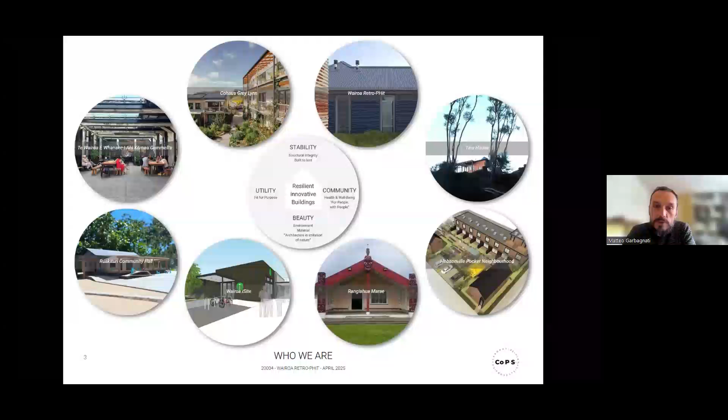Jessica introduced us, so that was already starting what I'm about to say. That's us, the two of us, Gabriele and me. We are based in Hawke's Bay at the moment. We started our journey in New Zealand in Auckland, then we moved here 5 or 6 years ago. So at the moment we are here in Wairoa, and there is a slide showing where we are. That's what we do. We have done a series of community projects, public spaces, private as well. Private projects, I mean residential, a bit of a range. We have done some work for the marae as well, mostly local, and some work also in Auckland.

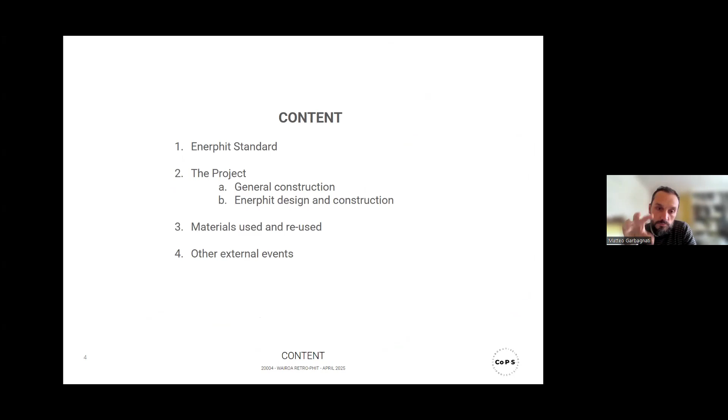About the presentation, what I would like to go through is first an introduction about the EnerPHit standard, then talking about the project, general construction stages, and then more details about the actual EnerPHit design and construction, and then briefly about materials used, reused, and whatever else we've done, and then touching on other external events at the very end.

And regarding the standard, some of you, I'm sure, are familiar already, but the certifications that the Passive House Institute created are three families. There is the actual Passive House, which is usually for new builds or retrofits. Then there is the EnerPHit, which is just for retrofits. And there are two methods for that. We'll touch on it as well.

One is the component method, and one is the energy demand method, which is very similar to the Passive House certification. And then there is the low energy building, where the requirements are a little bit lower, and that can be for buildings and retrofits. The EnerPHit component criteria, which is the one we followed, basically establishes minimum criteria for components, so the assemblies on the envelope, wall, roof, slabs or whatever else, and windows and doors, so exterior openings.

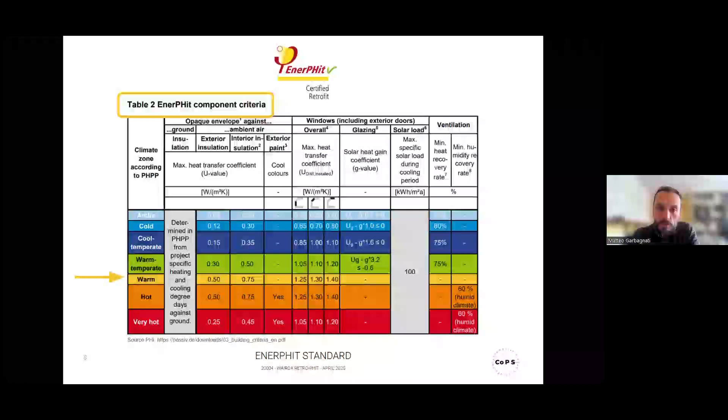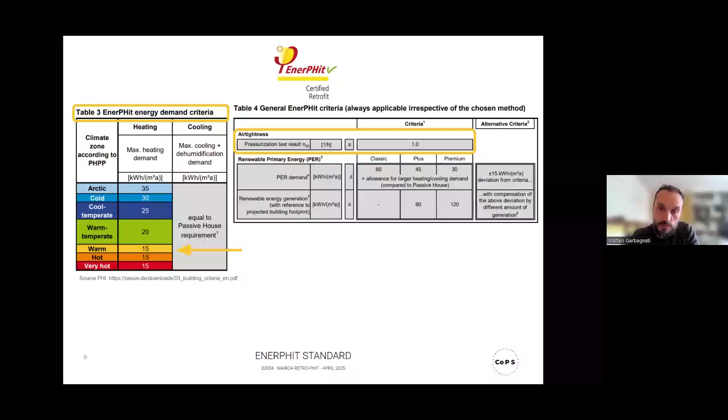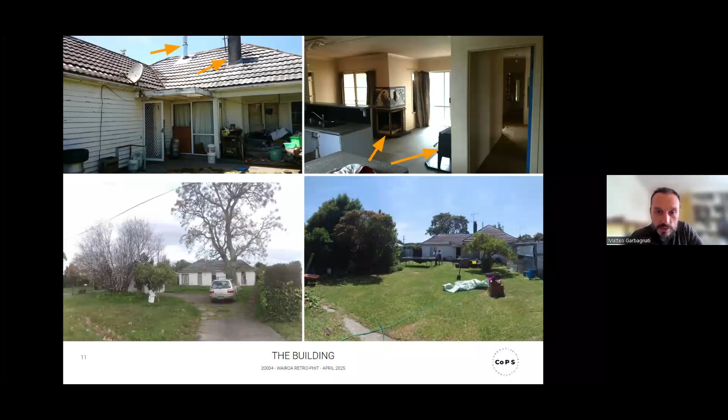So quite spacious. We liked the house because it has some interesting elements, in no specific order. There was all the volume in the roof, as you have seen from the other photos. The roof is quite pitched, about 35 degrees, and the ceiling height was 2.4 standard. So immediately we thought we could do something with that. And the other quite strong element was these floor-to-ceiling windows. It was a bit awkward that you could only open the top as a sort of awning, but that was quite striking, and that was along the whole north facade.

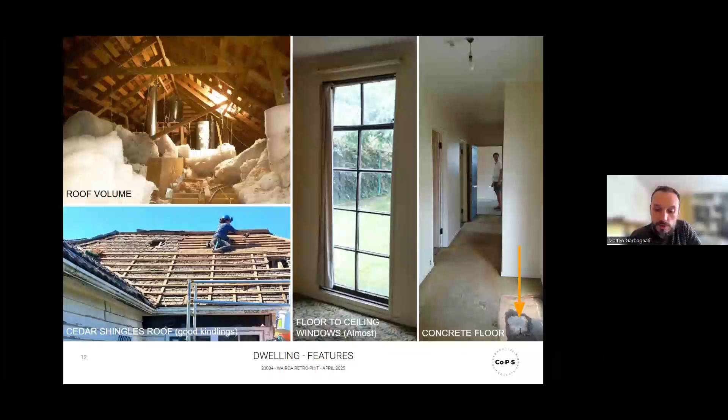And then there was the concrete floor, as you can see here, bottom right, through the worn-out carpet. And something we discovered later was that the old roof under the pressed metal tiles used to be cedar shingles. That was telling us that whoever built it cared about the way it looked, but obviously they were quite budget conscious as well. Then, of course, as you start the demolition, you discover all these nice surprises: wasps' nests in the wall cavities, asbestos ceiling, borer everywhere, a bit of rot here and there. But that's just part of the game.

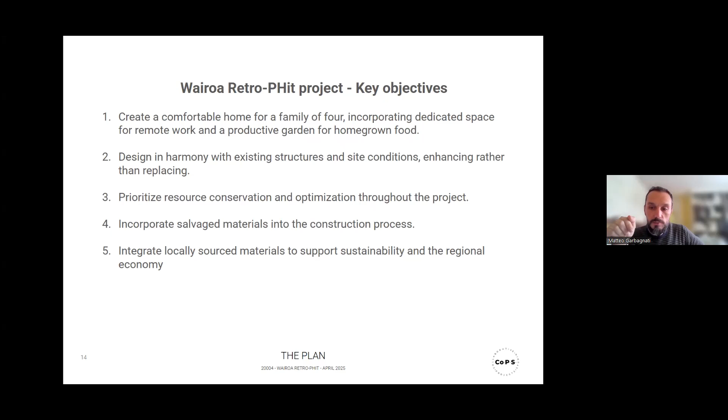And the key objectives for the project were to create a comfortable home for a family of, say, four, incorporating dedicated spaces for remote work, a productive garden for homegrown food, design in harmony with existing structures and site conditions, enhancing rather than replacing, prioritizing resource conservation and optimization through the project, incorporating salvaged materials into the construction process, and integrating locally sourced materials to support sustainability and the regional economy. And we managed to do a bit of that.

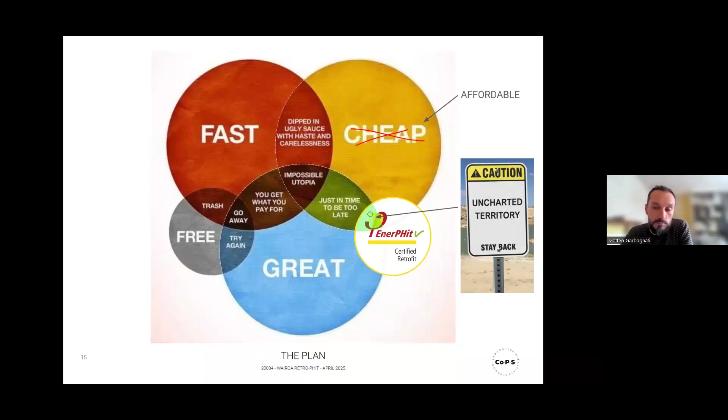You'll be familiar with the usual Venn diagram, where you can't actually have all of them: fast, cheap, and great, with some different variations of it. Obviously, we wanted this project to be good design, summarizing great. But we had and still have a very limited budget, so we are in the green overlapping zone. Plus, we also wanted to do a good quality, thermally efficient project. So that's why we chose the EnerPHit certification. It's a bit of uncharted territory, but we're getting there.

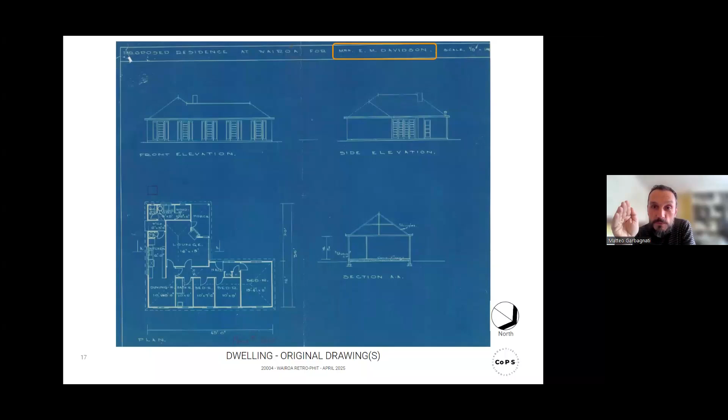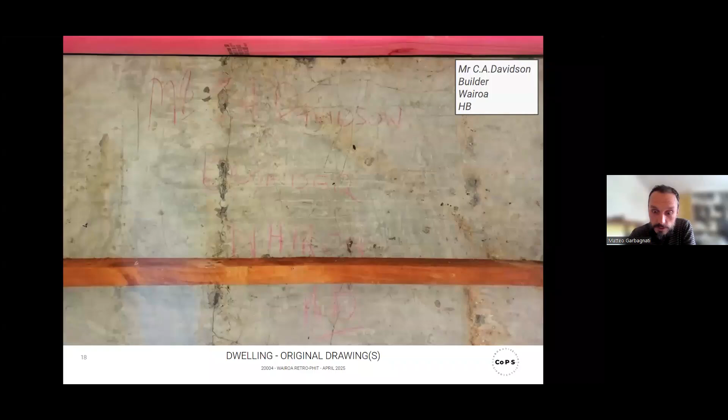Then we discovered, well, council had all documentation for this building, the historical documentation. This is the only drawing, so probably really that's all they had, and that's all it was actually produced. And this house was for Mrs. Davidson, and it was built by Mr. Davidson, so obviously it was the same family. And I found this signature inside one of the walls.

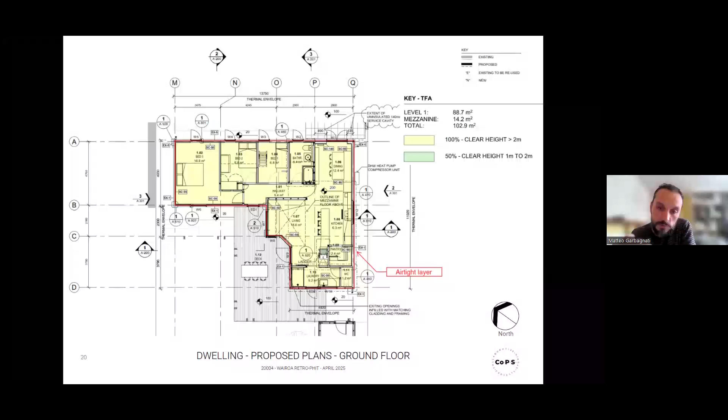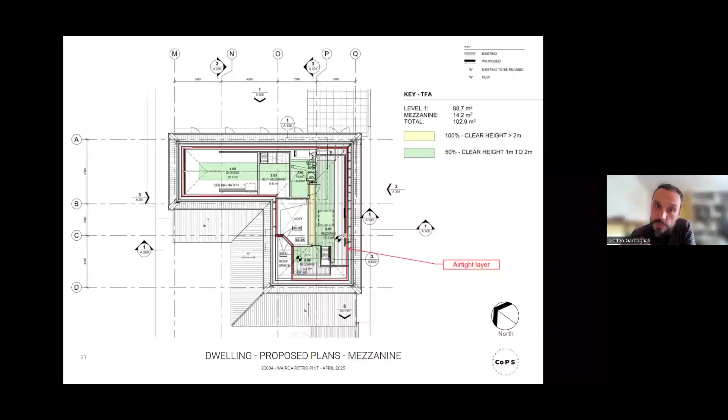Well, what's the new plan? 3-bedroom, 1 bathroom, nothing outstanding, and a laundry with a toilet and shower, and then kitchen, living, and dining all open. But because of all the roof volume, we reclaimed all the space in the roof, and we managed to create a mezzanine, which is open to the downstairs living area, a plant room, another little mezzanine for 1 bedroom, and then a bit of storage space.

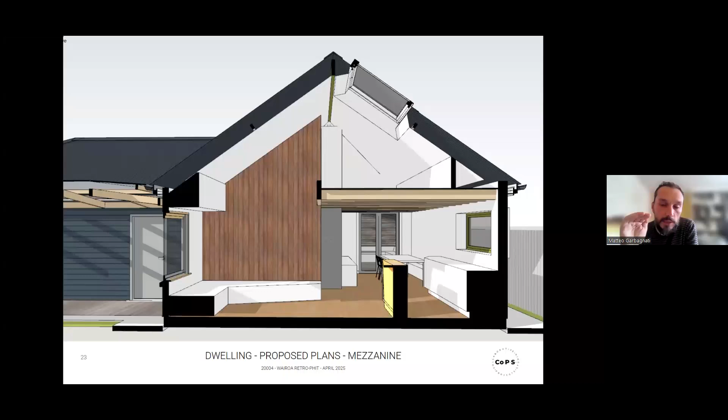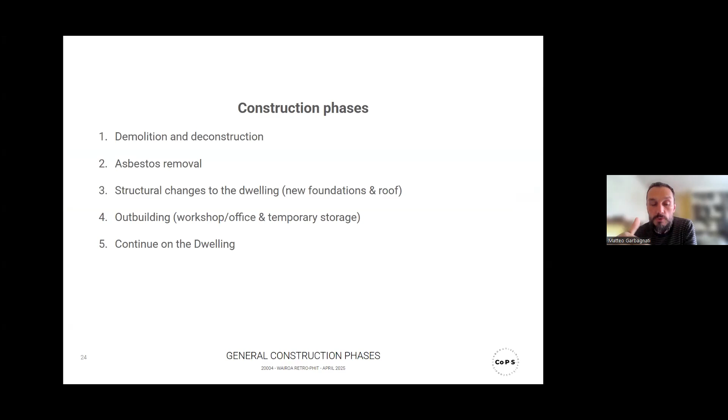Then construction phases broadly. So obviously demolition and deconstruction. Then we have done the asbestos removal. Then there were structural changes to the dwelling for opening up the roof and adding the mezzanine. And then there are a few photos about the outbuilding, which is not part of the certification, but it's important for what we're doing. And then the plan was to continue on the dwelling and finish it off. You can probably scroll through relatively quickly.

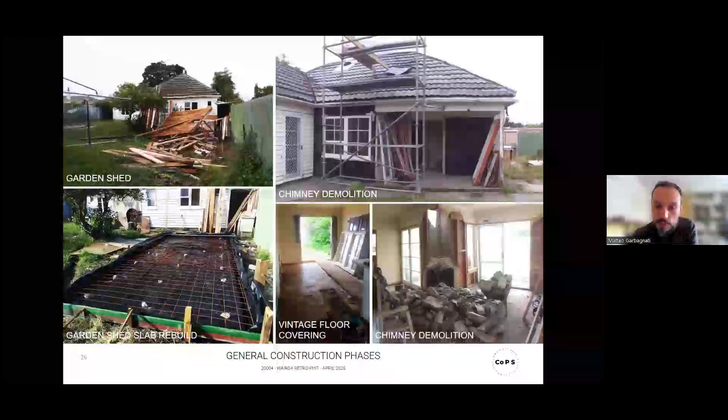Going from top left, there used to be a garden shed, which was nothing special, but I managed to reclaim some weatherboards. It was native timber, which I managed to then reuse in the house. That was great. Then the shed was kind of rebuilt, so a new slab built over. At the same time, we also started demolishing or deconstructing the house. We removed the chimney, we stripped off floors, we discovered several layers of vintage floor underneath.

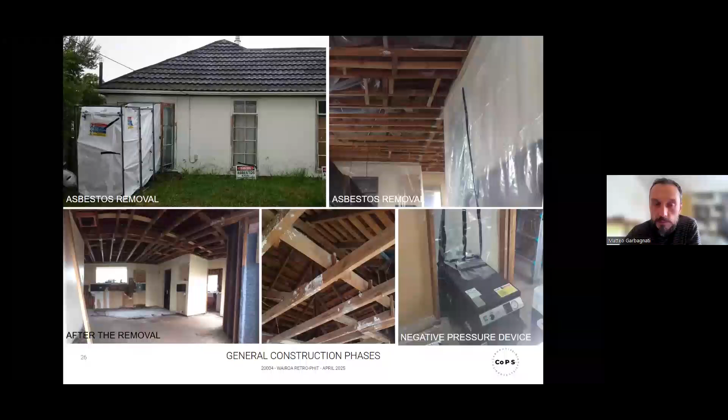Asbestos removal, we got it done by specialists, and that was great. Not too expensive either, I think it was around $5,000. That was probably one of the few things that we got done by someone else. Once they left, I removed all the ceiling joists here and moved them higher up so I could start with the mezzanine. Then there was the first time you could actually experience all this nice volume and space, and you can see the underside of the cedar shingles as well. It looked a bit more like a church rather than a house.

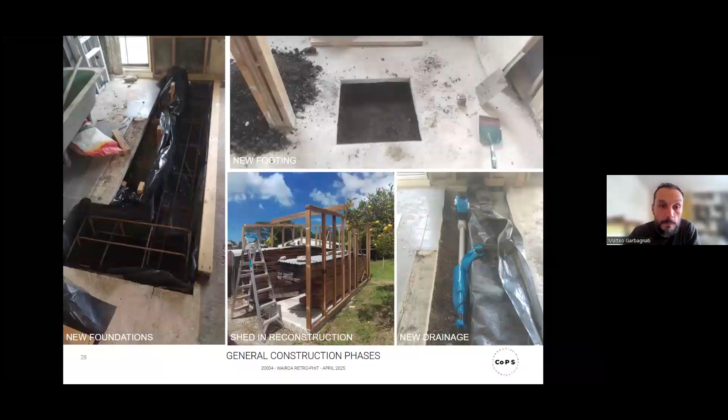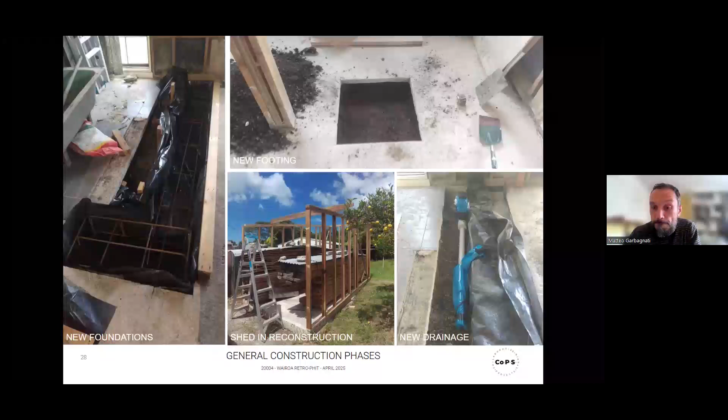Then we started with the proper structural strengthening, new foundations for the mezzanine, new roof structure. At the same time, we also rebuilt the shed, which was quite handy because we could dry the timber that we then used in the house. New drainage, this is pretty standard stuff.

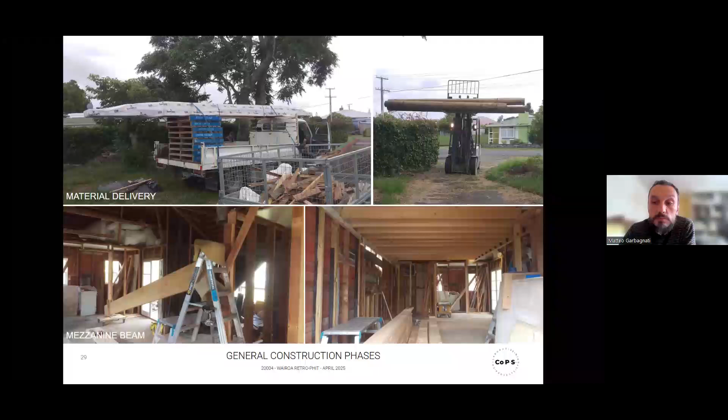I got them rough sawn, let them dry, machine them, install them. So everything takes a bit longer, but it's good. Then these slides are about the outbuilding at the front. Again, not part of the certification, but it's again part of the story.

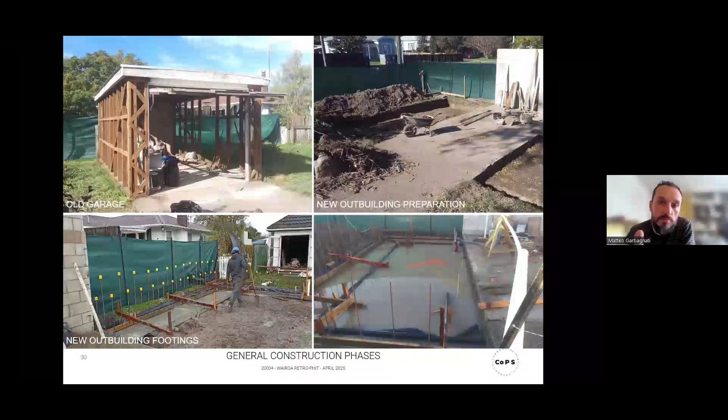So that's the old garage, which we deconstructed. The cladding we are gonna reuse in some areas, which is rimu cladding. All the rest is also dismantled and piled up. We might use it at some point. Then, yeah, just foundation preparation, all dug up by hand with a shovel, again, low tech. And then we've done the ground beams,

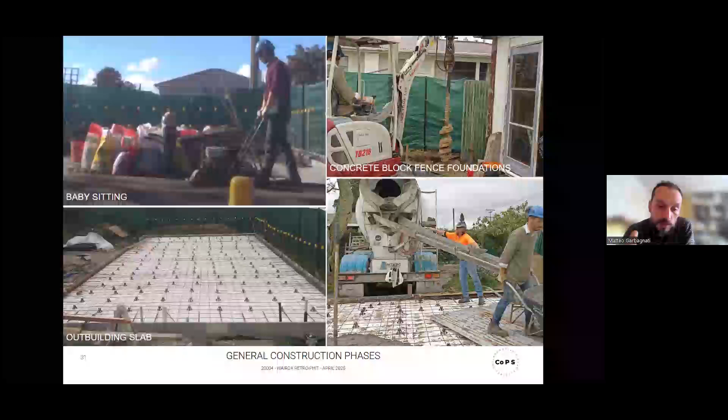footings. Well, I hired a digger because there was a portion of the fence which was also concrete blocks, which needed quite deep piles. So for that, the digger with the auger was very handy. And then these slides are about the slab. So the garage, although it's not certified and nothing like the house, we still have done something sensible.

So we have done insulation underneath and also outside the block wall. It's a block wall because on one side it's right on the boundary, so it needs to be fire rated. Anyway, so yeah, I've laid the blocks. Again, another thing of Wairoa, there are no block layers.

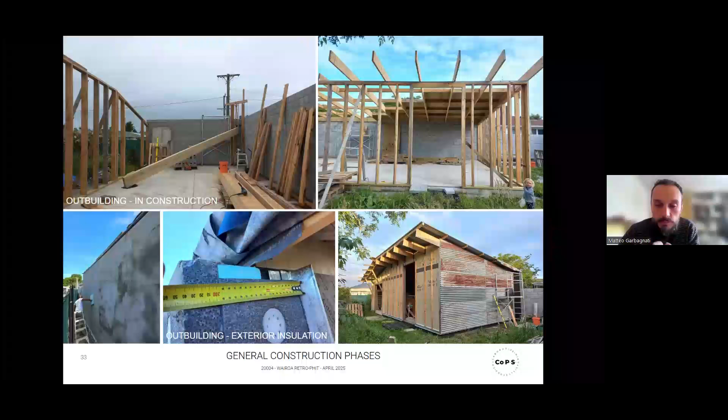We had it plastered by a specialist, and it was really good. And the bottom right, you see the outbuilding partially cladded. That's all reclaimed roofing, and I think it's going to be the final cladding, obviously with some finishing trims and flashings. The carport will come later, which will be an extension of this outbuilding. We wanted the outbuilding to be built before continuing on the house because we need storage space.

Then more delving into the actual house upgrades. So the bullet points of the EnerPHit upgrades are pretty standard, nothing outstanding. Basically we are insulating the walls, which are all 90mm framing or thereabout, and we added a 50mm insulated service cavity. Sometimes it's 90.

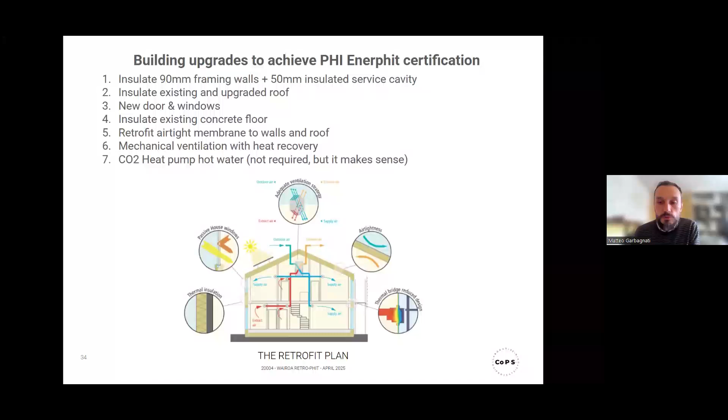Then insulate the existing and upgraded roof, new doors and windows, insulate the concrete floor, retrofitting the airtight membrane, and then mechanical ventilation. And something not required for the certification, we also chose to have a CO2 heat pump hot water system that can also do space heating, and there is a bit more about that later.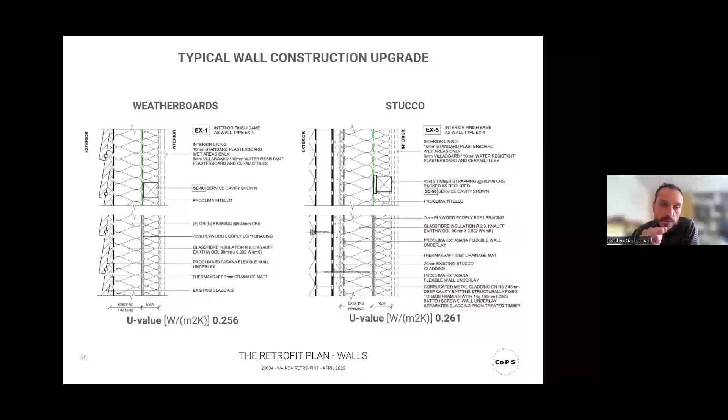Typical wall construction upgrades. There are two main types. One is with weatherboard, because the house has two claddings: timber weatherboards, and the north facade was stucco. That was facing the street. Maybe they liked to have a bit more of a representative facade, for whatever reason.

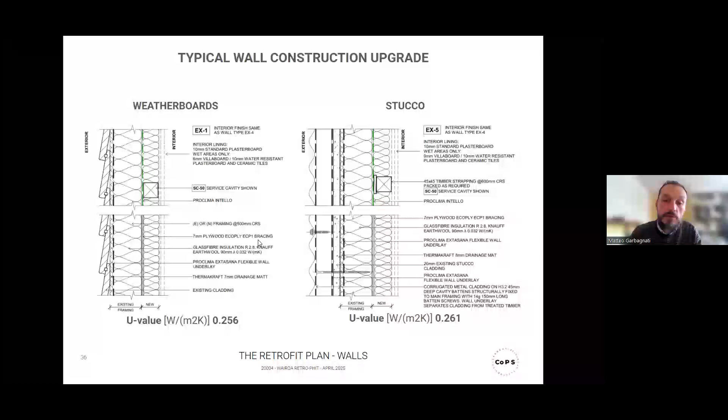So we insulated the 90mm framing cavity and added the airtight membrane, for which we used Pro Clima Intello. In some areas it's plywood because we used it for bracing, and then there is the service cavity with services. The stucco facade is the same, except that we added an external drainage cavity and new cladding. You will see more later. That's the process of upgrading the walls.

Top left, we used drainage mat between studs and a wall underlay, which was retrofitted everywhere. At the end of the day, I had to replace 90% of the studs, one by one. In some areas, I didn't even remove the weatherboards. I was just cutting the nails from inside, removing two studs and replacing them. Long process, but whatever, it's done.

And what that allowed me was also to respace the studs, because some of them were a bit odd, probably old spacing, 450, 600, 500. I respaced them all at 600 where I could, and obviously no nogging.

Then the rest, I'm sure you're familiar with all this, it's all pretty traditional in this environment, at least. Insulation, we used glass wool and then Proclima Intello, an airtight membrane. The other thing is the packing, so the bottom image in the middle. The walls were not plumb, obviously, so we had to pack pretty much all the horizontal battens, varying between 0 and 25 mil.

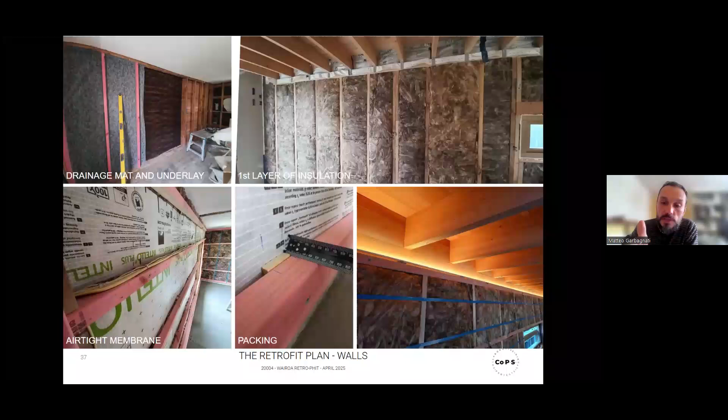Bottom right, we also integrated some feature lighting, making use of this service wall. So the wall is packed out a bit more. In this case, the service cavity is 90 mil, so we had room for a lighting feature.

This is just a slide to show what we have also done in terms of services protection. There are these plates that you can just nail onto the studs, and obviously they prevent you from piercing services, pipes, or whatever else you have. They're not easy to find in New Zealand, but I think they're very useful, and they should be made compulsory.

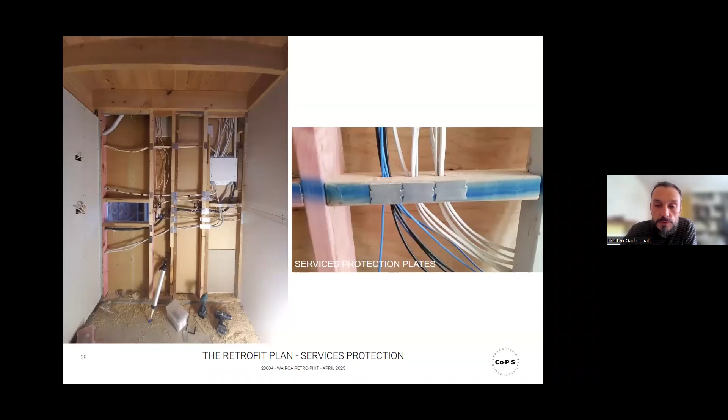That's the north facade I was mentioning, stucco, just during construction. The old facade, which was a bit cracked. But anyway, we strengthened it, we fixed it to the new studs, so it was all solid at the end.

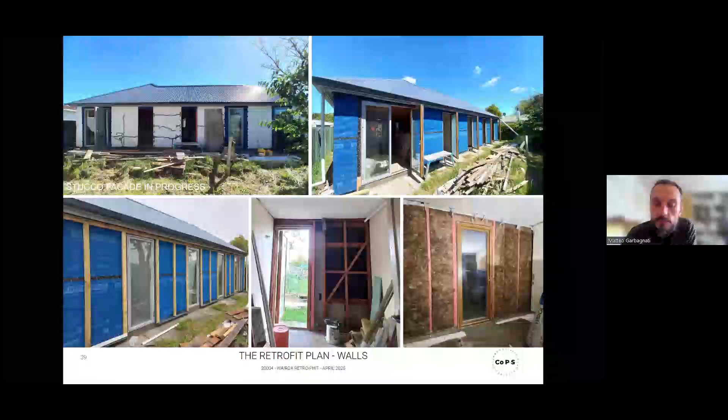Retrofitting an underlay, putting cavity battens, which are just studs, 4x2s, treated, and then it was insulated on the inside as the other walls. We also used the drainage mat on this side just to separate the insulation from the stucco. I didn't like the idea of the insulation touching that stucco, potentially having some condensation.

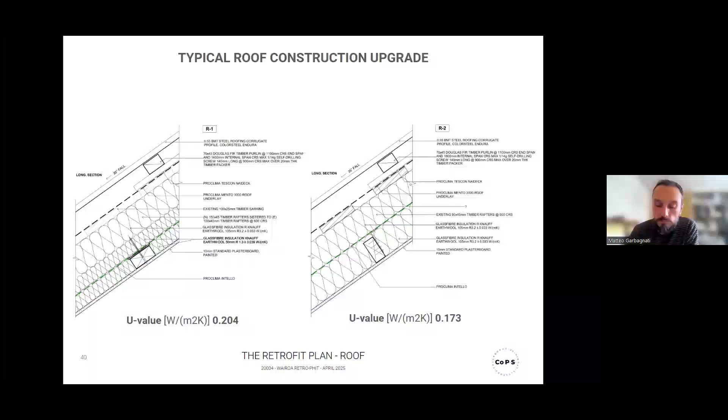Roof construction upgrade, again, quite traditional for a certification type. Two systems. The one on the left is where we upgraded the rafters. So there are 150 rafters, then the airtight membrane, and then a 50 mil service cavity. And on the right, it's where we used the original structure. So it was about 100 mil rafters, airtight membrane, and then 100 mil service cavity. Overall, it's pretty much the same insulation, about 200 mil of insulation everywhere.

Then some images about roof construction. Again, we stripped off all the existing roof, the pressed metal tiles, the cedar shingles, and all the layers, underlay, battens, and purlins. Sorry, I didn't say. It's a ventilated roof, so above-sheeting ventilation, and that's why I was quite comfortable making it into a skillion roof. Otherwise, I wouldn't have done it.

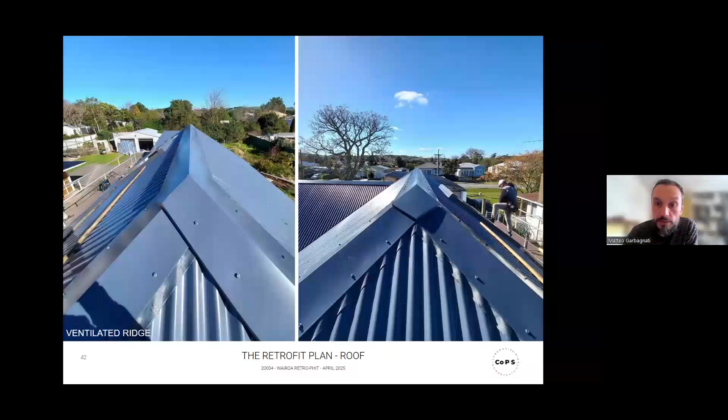These are just some flashing images I had. You can see that guy, a friend builder, very skilled at everything really. He gave me a hand with the roof, and he was really good with flashings.

Then what do we have here? It's just some more images about the roof. So once the roof was done, we started insulating. Again, glass wool, glass fiber insulation. And then the bottom right image is where the roof is lower. That's the part that at the very end is reclaimed as storage, and then forward is the little mezzanine for one of the bedrooms.

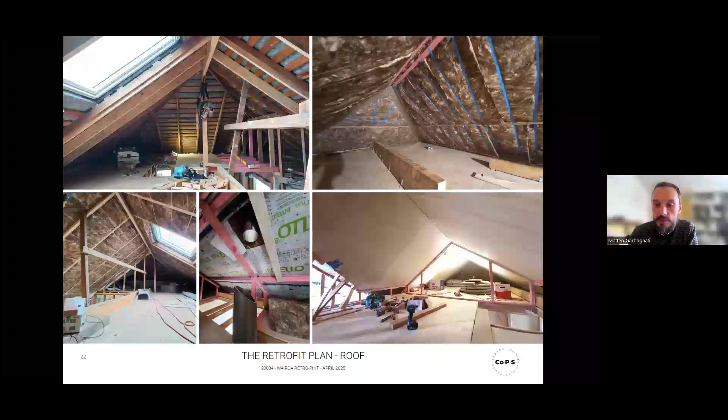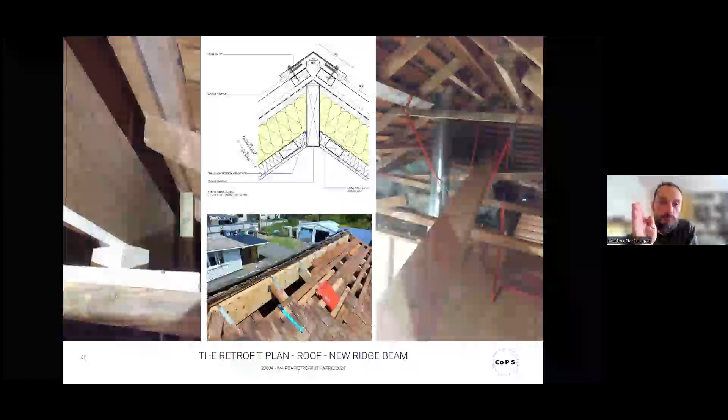And then this, retrofitting a new ridge beam, was also a bit of a mission. I had to separate the existing rafters from the old ridge board, shorten the rafters, and fit in a new ridge beam, all while the rest of the roof was propped and held together in some other way or form. But it was good, I think. It's good to do it. You save space instead of putting it underneath or doing some other old stuff.

Exterior openings. We have one skylight or roof window. We managed to use Velux, which is readily available. Overall, it's a good product. I'm sure you are familiar with that. In terms of certification, we are pretty much on the edge of making it work, as you will see later in the numbers. Even with triple glazing, it's very much on the edge. The image shows double, but we had triple.

The installation is also quite critical, because it's all around the skylight on the outside. You see it's all packed with polystyrene, and also inside.

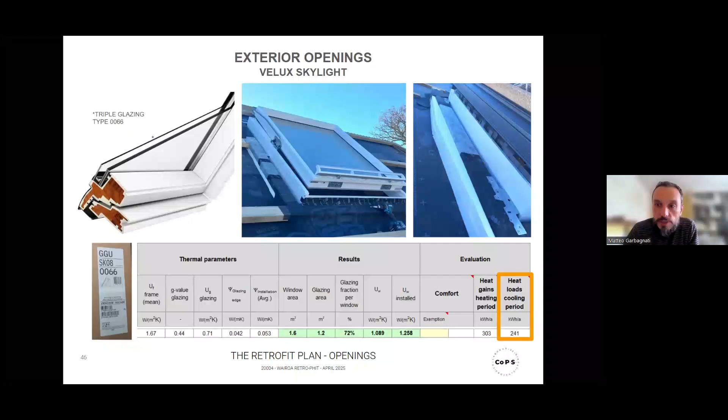One of the drawbacks, of course, of this kind of window is you probably get too much unwanted solar gain, especially in summer. But other than that, from an architectural point of view, it just changes the space dramatically. So definitely a plus there.

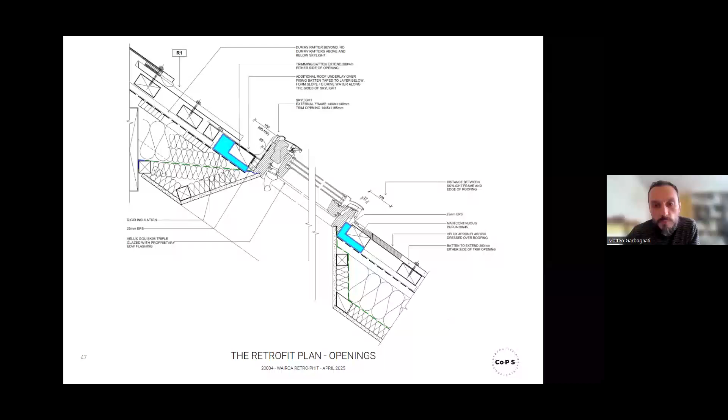Installation, as I was saying: all the blue region is all the packing of polystyrene that needed to be done in order to make it work for the certification, ultimately in terms of ensuring there was no internal condensation or other awkward stuff happening. These are the images from Flixo.

And believe it or not, I could find condensation right there after it was installed, and I think it went through winter. So there was always some moisture in the house. So Flixo, I found, was quite good, quite accurate.

The other thing about the skylight is obviously the installation speaks for itself. The skylight is pretty much all sticking outside the thermal envelope, and you only rely on the actual frame of the skylight as your separation between interior and exterior. So probably a different construction, a different skylight would be better. But that's what Velux produces.

The other tricky thing with the skylight, at least with Velux, was to get accurate data for the U value of the glazing. Honestly, the rep I was dealing with didn't even know what I was asking. So at the end of the day, you have to calculate it yourself. They give you the U value of the glazing at 90 degrees, so vertical.

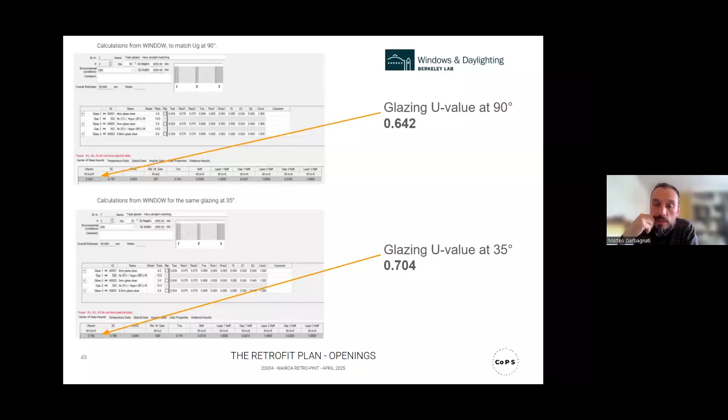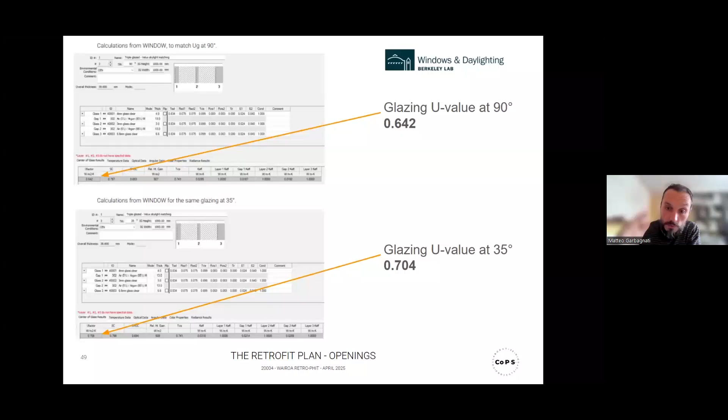And as the glass angle changes, the U value changes because of the convection inside the air space. We used the software WINDOW, and you can just calculate it: you can see 0.642 for 90 degrees, and obviously it gets worse and worse as it goes closer to horizontal. That's just a detail about what you have to do in terms of certification.

Exterior openings, windows and doors. We used these from Inwido, or Elitfönster. They are imported by a company called My Kiwi Home. They are not a certified component, like the skylight is not. That means you have to calculate the U value of the assembly, which you can do easily in Flixo, but if you use a certified component, half the job is already done.

We are using a timber frame with an aluminum skin outside, triple glazed. They are good windows, not extremely well performing. Obviously, they do a good job here. I don't know if they will work in a colder climate zone. That's something to test in PHPP.

We chose these because we came across them with another project, also going to be an EnerPHit project, where Sustainable Engineering was doing the passive house design, and they pointed out this window supplier. So we tried it, and we got a quote which was the same price as a quote I got for timber windows and doors made in New Zealand, but double glazed, around 40,000.

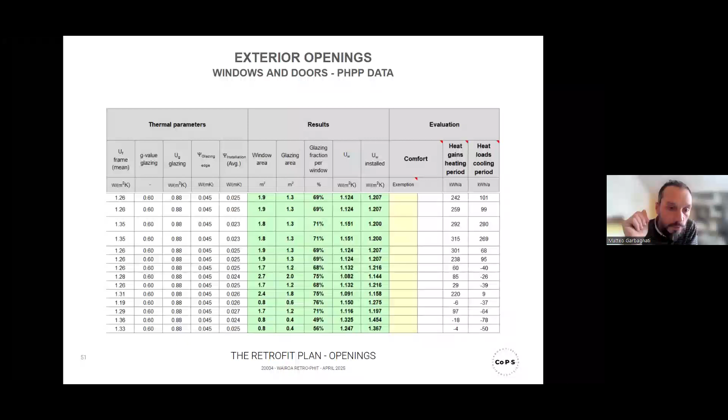These are the extracts from PHPP. As you see, they are all right performing, not amazingly performing. The U value of the frame is between 1.26 and 1.3. The glass is 0.88, which is fine as triple glazing, not top performance, but does the job.

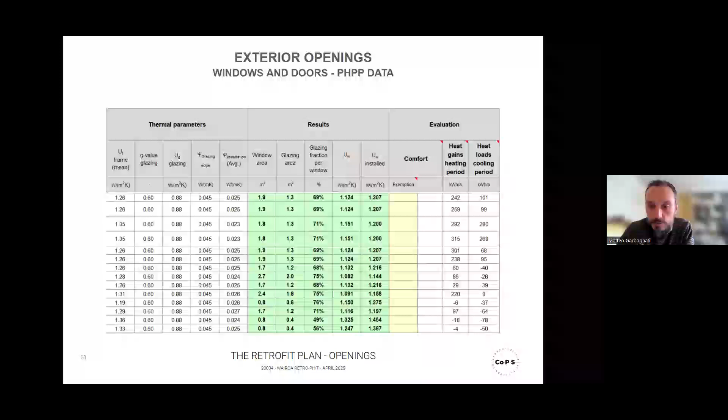Floor construction upgrade. As I was saying, concrete floor, although it's about 60 to 70 mil concrete, unreinforced. It's more like a screed rather than a slab, really. And what we had done was to retrofit a damp-proof membrane on top because there was none. We used an epoxy resin, and on top of that, we also used a cementitious one. On top of that, there will be rigid insulation, 25 mil of XPS, and then engineered flooring right on top.

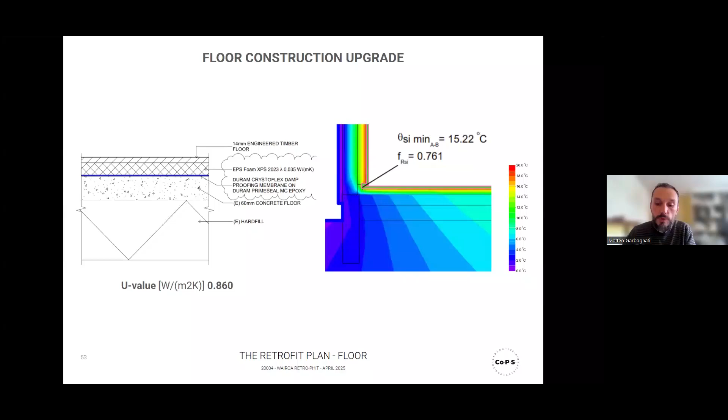Obviously, the constraints here are, you can imagine, headroom. You don't want to build up the floor too much, otherwise you lose headroom. I did play a bit with increasing the floor insulation, but then PHPP was showing that it would overheat more and more. Obviously, the floor also contributes to absorb some of the extra heat that the house accumulates. So at the end, we stopped. We settled with that thickness, 25 or 30 mil. It was a good balance between not losing too much headroom, easy to install, and a good balance between energy demand and overheating. And that's the condition of the existing slab.

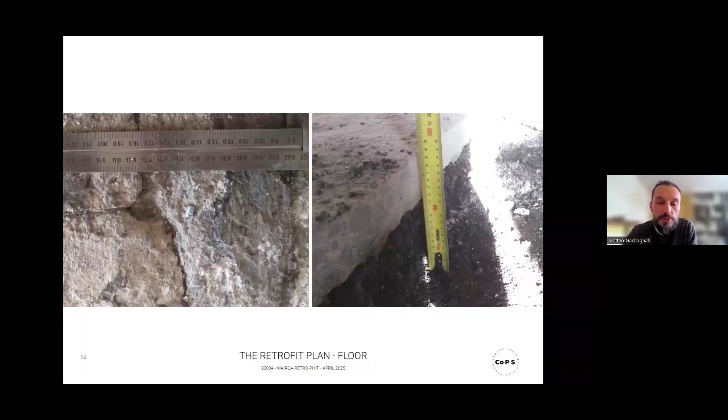Nothing great really. It was a bit scary sometimes. Quite thin and a bit damaged, but we managed, in order to keep with the initial points. We just like the idea that we do the best to keep what's there at the moment, unless it's extreme, unless you can't really work with that. That's why we kept it as it was.

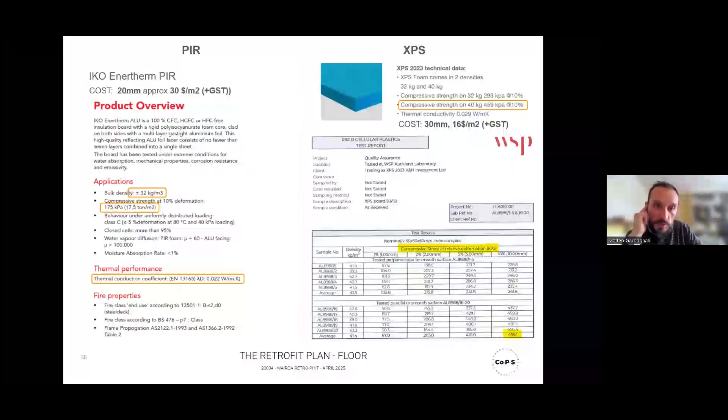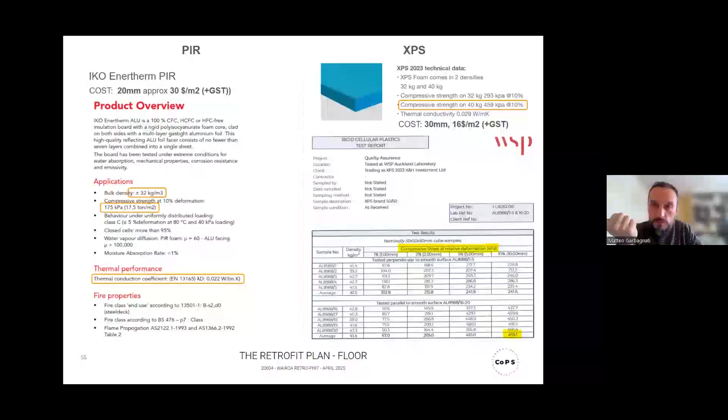This is just a quick comparison between the two types of insulation we could have used, PIR or XPS. We chose XPS both for compressive strength and cost. So the equivalent insulation to achieve the same R value or U value, XPS is about $16 a square meter, and PIR is almost double that. The other thing is compressive strength of PIR is much lower than XPS, about 450 kPa for XPS and 100, 150, 175 for PIR, but it varies with different brands.

This shows the U value that we are achieving with that floor construction, and we could have achieved the same with a thinner PIR, but we didn't do it. Just as an example. Then the other big thing is obviously retrofitting the airtight layer.

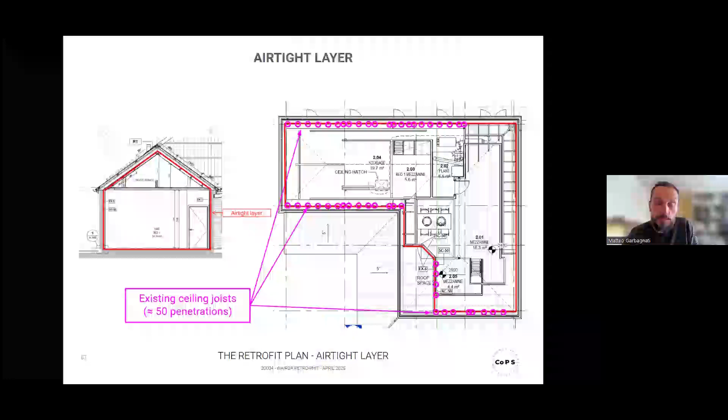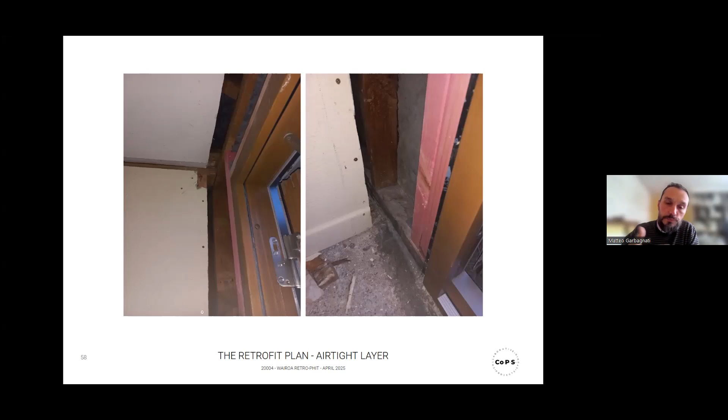The challenge was going all around the existing ceiling joists, which we didn't touch, where we kept them, and there were about 50 penetrations. I've cut all around the perimeter. I cut short all the internal walls to create a gap that you see in these photos, about 50 mil, where I could fit this airtight membrane easily without issues with taping or anything like that. But obviously the ceiling joists, I couldn't cut them. So just sketching and thinking how it could be done, how it should be done. And at the end, the only way is just tape around it, really.

Conceptually it's easy. Obviously, you're dealing with extremely tight spaces, especially close to the corner of a roof; you have to lay down in the ceiling space, stretch your arms and work and hope for the best. But at the end it kind of worked out.

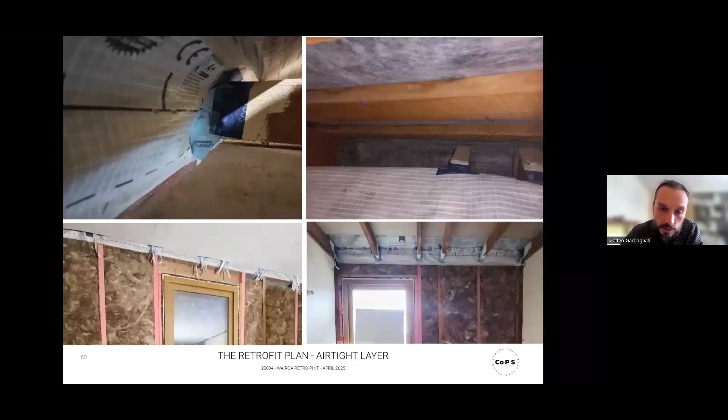What I've done is cleaning the ends as best as I could, then prime them with paint, to make sure that there was no dust. Once it was all dry, the tape was sticking pretty well to it. Then I just ran a strip of Intello from the top, cut it around the joist, dropped a little bit underneath, and then joined the Intello with the one that was on the wall.

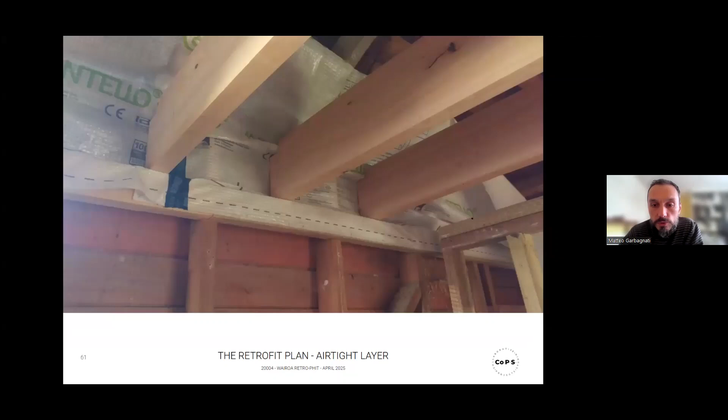Where we could, we put the Intello before the ceiling joist. In this case, that's the mezzanine ceiling joist, and that's how you would do it for a new build. But obviously here we couldn't. Just standard sealing of all the services penetrations, and the end result was good. I wasn't expecting that. We had 0.45 air changes per hour. And ProClima quite amazingly offered to do the blower door test at no charge, which was great.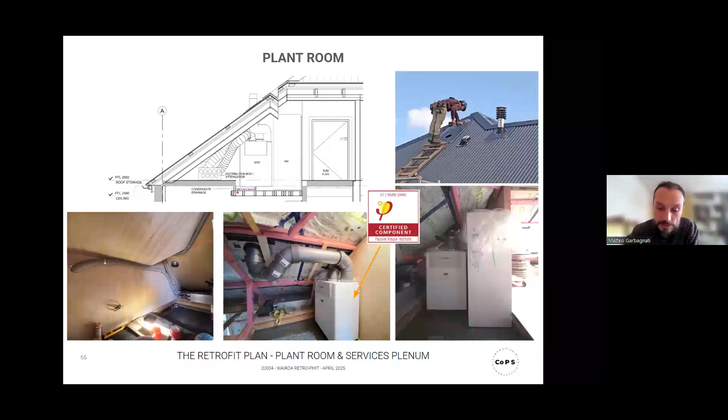Then the plant room. Great that we managed to create some space for it, because it's very useful. It's extremely cramped, but it works. We are using, as you recognize, a Stiebel Eltron heat recovery mechanical ventilation unit, and the one next to it is the EcoDan hot water storage. It's the split system CO2 hot water heat pump, and there is more about it later again.

That's the typical arrangement for services, since we reclaimed all the roof space. Obviously, the portion where roof meets ceiling or mezzanine floor, you can't do anything other than running services. And some areas are like that, run there and then closed off, like shown on the top left. That's the bottom right. You see how tight these mechanical ducts are.

Space heating: the EcoDan split system can do also space heating, which was a good discovery for us. We wanted to use a CO2 heat pump because of the extremely low GWP, and obviously for the energy efficiency that a heat pump has. For space heating, we arranged it with two radiators. One is a heated towel rail in the bathroom, and one is a tall vertical radiator in the living area, close to the table.

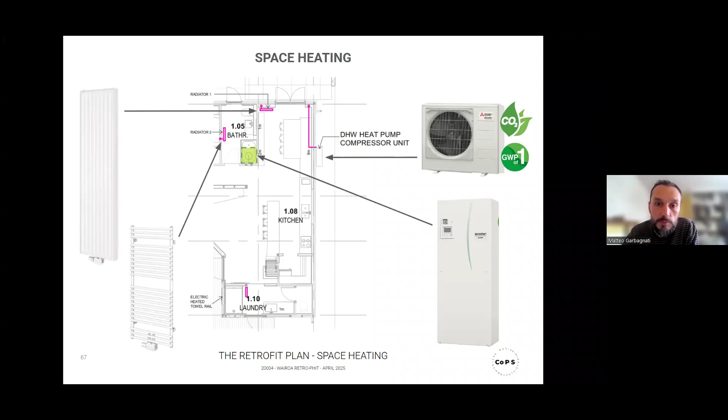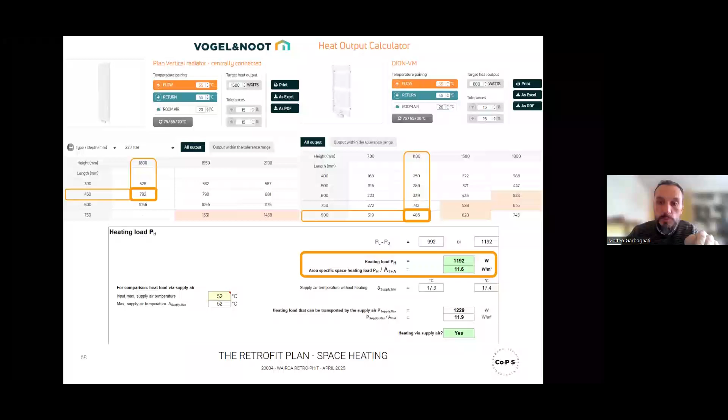The overall heating load is about 1.2 kilowatts. With these radiators, you can calculate the heat output according to the temperature of the flow and return water. EcoDan has flow, so incoming water, at 55 and return at 45. I think you can also change them, even lower. But anyway, this calculator tells you the output, so I just sized these radiators according to what we needed, and that's what it equals in terms of standard electrical heaters. So not much, and I don't know how often we will need it.

Then general PHPP metrics. The overall heating demand is 27.4, so quite far from the 15 that you need for a passive house. Again, using the EnerPHit component method, the heating demand doesn't matter. It could be 50 even, because what matters is the component characteristics. As you see from top down, the envelope is relatively easy to keep well within the maximum allowed. We get 0.21 as average U value of the envelope, and 0.5 on the right is the maximum.

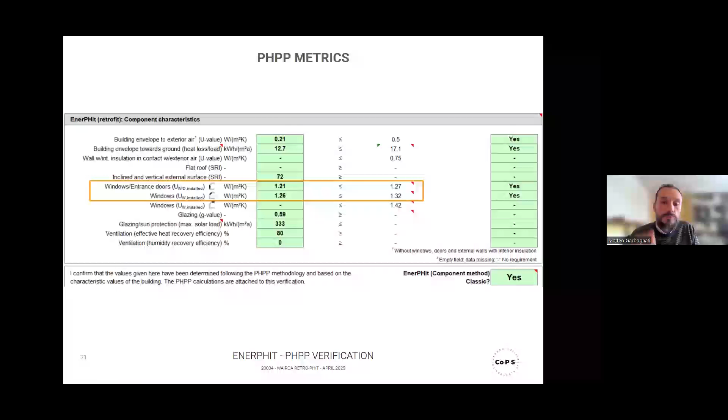What's harder are the exterior openings, windows and doors. Despite having triple glazed timber framed windows, we are just below the maximum that we can use. This is showing the energy balance from the PHPP heating sheet. Obviously the floor is the weak point, so that's where most of the heat losses are. But overall, we had to live with that,

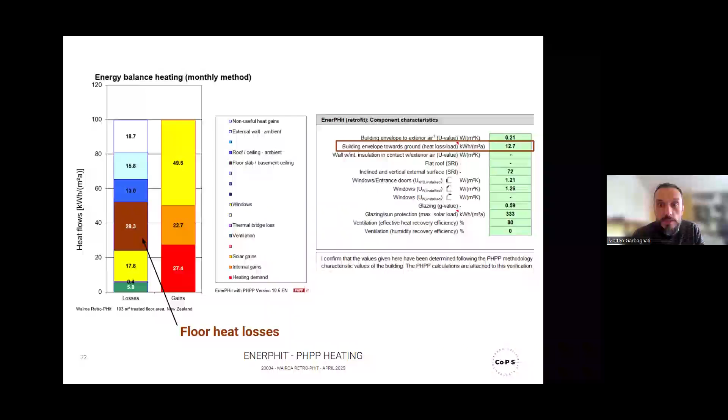being a retrofit. This was to show how the house was performing in its original state, with single glazing, no insulation in the walls, insulation in the ceiling. PHPP estimated about 216 kilowatt hours per square meter per annum as a heating demand. After all this, we are down at 27.4. So it's about a 90% reduction, which gives the idea of the efficiency that you can obtain with this type of certification.

Then, outside the EnerPHit certification part, this is more about the materials we used. As I was saying, we used some macrocarpa for the mezzanine structure, and the floor is all macrocarpa, locally sourced. Literally a guy that I met, he cuts down trees and mills them. Then you can go and get whatever you want, or you can cut whatever you need. Like this one, bottom in the middle, macrocarpa beams. I literally just asked him for this specific size, and it was delivered at home.

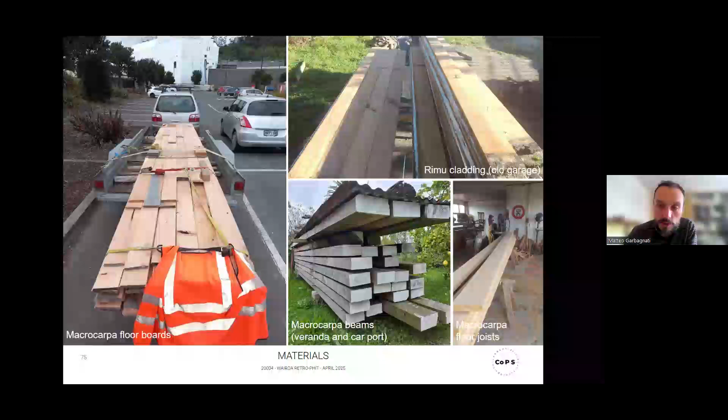And this would be the timber for the veranda structure, and the carport as well. So we like to use as much as we can of these locally sourced materials. And top right, that's the cladding, rimu cladding that came out of the old garage, which we're going to use for some interior linings. And then we also reclaimed some framing timber from buildings that were being demolished here in Wairoa. Literally, you just go to site and ask for it, in exchange for a bottle of wine or a box of beers, the usual.

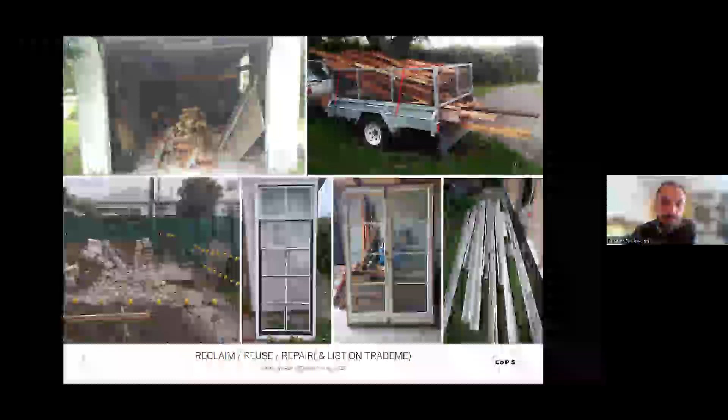This is just one trailer load, but we had quite a few more. I first basically went through all the timber that we reclaimed for reframing or whatever we needed to do, and only at the very end I had to buy some new timber for framing. Then what else? The other reclaimed or reused material is part of the existing garage, a block wall, which was pretty much useless. So we demolished that and used it, pretty standard, as the hard fill under the garage slab.

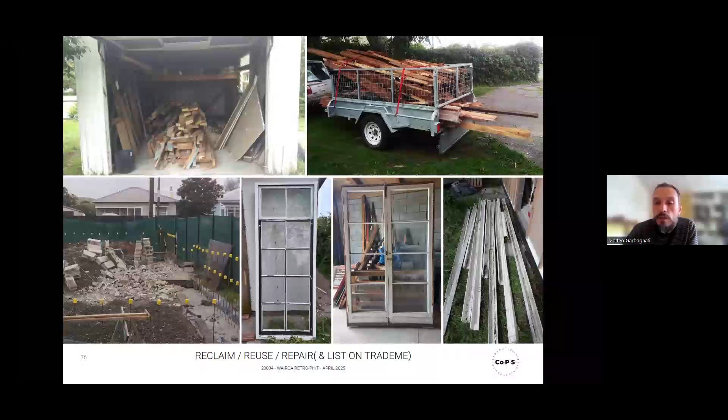And the old windows, which we didn't really want, we just sold them on TradeMe for nothing, like $1 or $10, but someone else will use them. The same for the old PVC spouting. Somebody was definitely happy to buy and reuse them.

And then, just jumping onto other events, because just checking time, we are pretty good.

Obviously, in a project you can do your best to control what you can control, budget, design, timing, but there are always external events that you can't control. For instance, in Wairoa, you might have heard, there was a big flooding in February 2023. We were not affected directly, so our house was fine. The flooding was more on the north side of Wairoa. Obviously, it was a major disruption for the town, for a lot of people that we know, and the district itself. So that was quite an important milestone there.

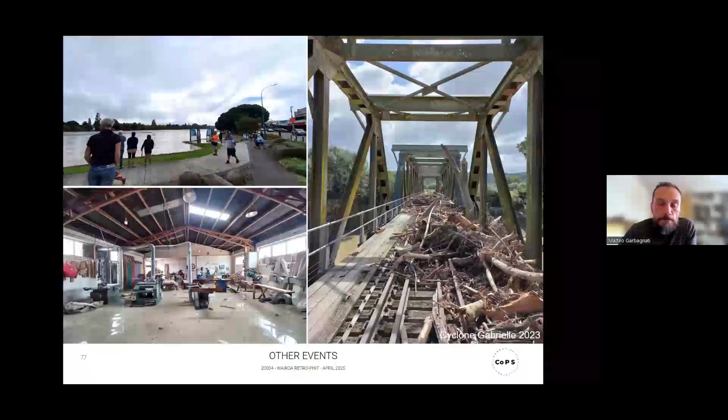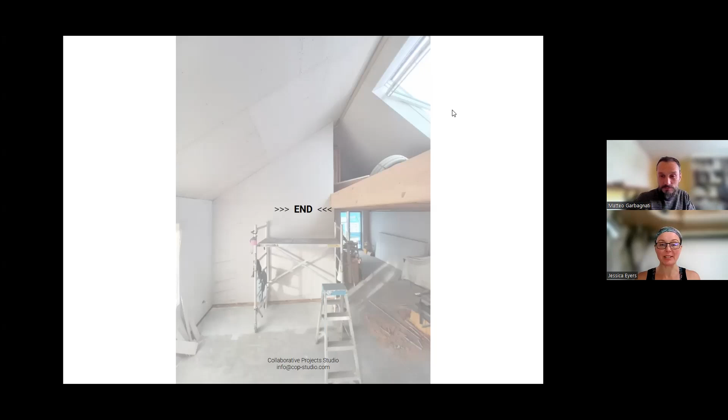Awesome. Thank you so much for that, Matteo. That's an incredible insight into the project, and it's evident the amount of blood, sweat, and tears that's gone into that project. So congratulations. I find it incredibly inspiring because we know how to build energy efficient new buildings. We have some pretty established methodology for that, and a lot of experience with that in New Zealand. But the elephant in the room is the existing housing stock, and how we're going to upgrade that to be as warm and healthy as we know we can make new builds. So it's really encouraging to see that even with a project that had so many challenges, you still managed to achieve an incredible result. It gives me a lot of encouragement. So thank you.